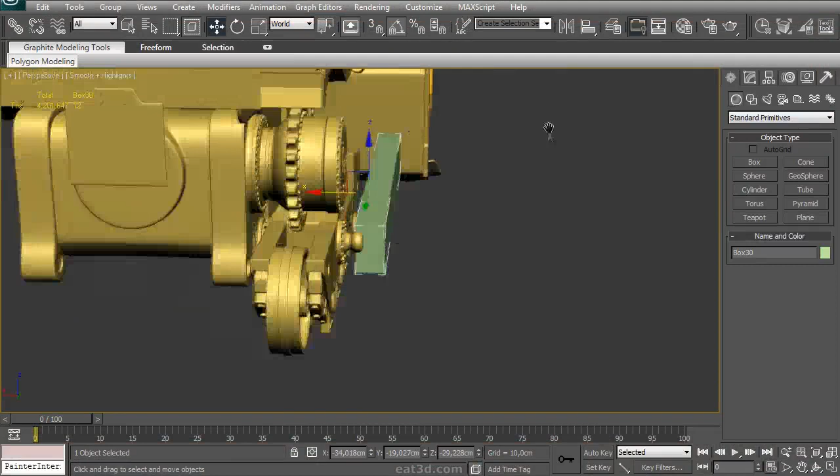I'm just starting off with a box here, and another part I'll be needing to connect these boxes to the big axle is a cylinder. You can see me creating that here, trying to align it nicely to the center of that axle.

Because that axle doesn't have its own pivot, I'm going to have to align it manually. Here we are. Now with that done, I need to align them slightly more. This looks about right. Then I'm going to turn the segments down to make it easier to work with, and I think I'm going to use 18, which is always a nice number to work with.

Then I'll perform an inset on it. This inset just serves to create the hole in the center there. With that hole done, I'm going to go for the next adjustment, which is creating a division in the center.

The reason for this division is the connection for the mounts to the big axle is some sort of clamp. There are two halves of a cylinder that are clamped around this part. They're connected with big bolts, and if you'd loosen those bolts, you'd be able to remove the mounts from the center axle. So that's what I'm doing here.

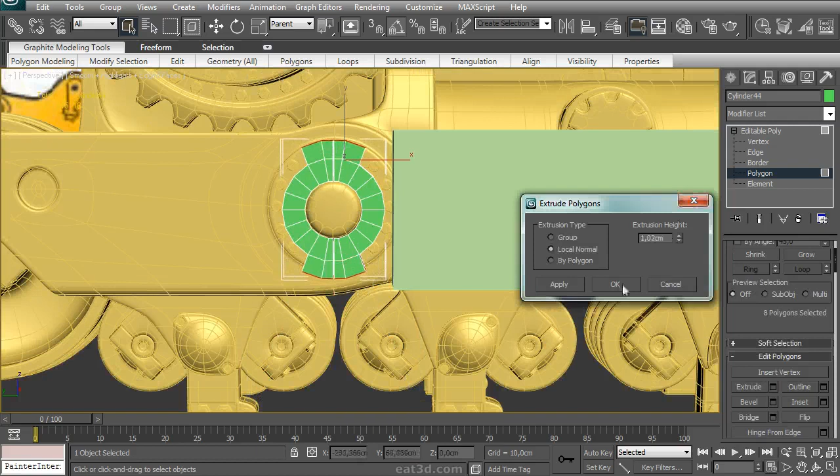It's a little bit tricky to model, but not all that difficult. These parts are actually sort of extrusions, and these extrusions are where the bolts for fastening this clamp mounted to. So first I'm aligning it on one axis, and then I'm using the snap to move them to a perfect perpendicular shape.

Doing the same on every side. Not very difficult. There we go. That done, I'm going to add a few subdivisions to make sure these things are hardened up nicely, and then adding an extra one here.

I'm going to add an extra subdivision in the center, move that out slightly, and then I'm just simply going to move these in. This is an interesting shape. I like how this has this sort of beveled look, so I'm definitely paying attention to modeling this correctly.

If that's done, I'm selecting these shapes. I'm using select by angle, which makes things a lot easier to select. I'm just simply removing these loops again, as I'm going to use the inset trick to add some extra loops here.

The inset trick is easier than having loops running around corners, because then you have to manually connect them. But if I use this trick, as you can see at the corners of those extruded parts, it just looks nicely like it should. Here we are.

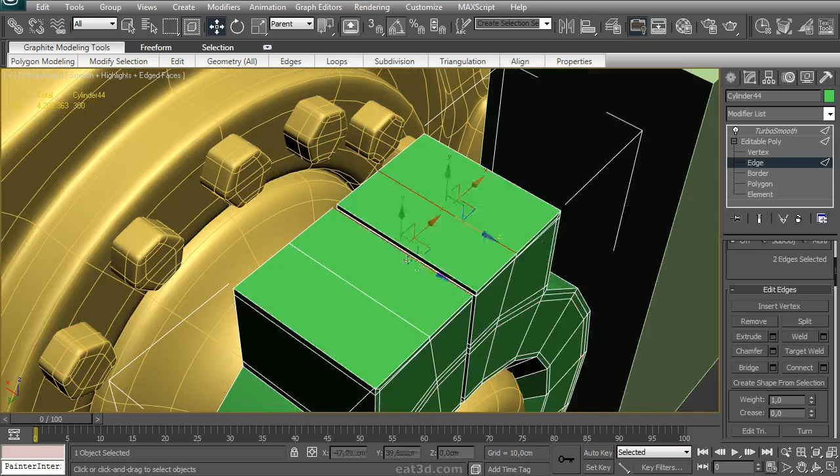I'm just going to add another line here and two extra connects here, and there we are. Two more in the center. And now we need to model the part at the back of these clamps, and this part just connects to the main mounts for the front blade.

Nothing too difficult. I'm just using a line tool, moving this around. As I said, these things are mounted together with bolts, so I'm just using the same old bolt model as I have all along, and I'm copying it down and reusing it.

Then I'm just mirroring them, so they sit on two sides. With that done, I can just attach all of them. That's a lot easier to work with and reduces the number of objects in my scene.

That done, I'm going to add a few extra edges here. Might seem a bit strange since I'm creating n-gons, but of course, I'm simply going to fix this up by removing one loop there. If I'd have created this before I did the inset, then I wouldn't have had this problem, but fixing this manually afterwards isn't that much trouble at all, so I'm just doing it this way.

So there we are. Added turbo smooth, looks pretty good. Just need to do a slight adjustment to this axle in the center. So I've selected that object and I'm working on that one.

Selecting every two other edges of that cylinder. The reason for that is there are actually 4 holes for another set of nuts and bolts in the center of this axle. I presume that's just for fastening things together. Don't have that much insight into how this bulldozer is exactly constructed.

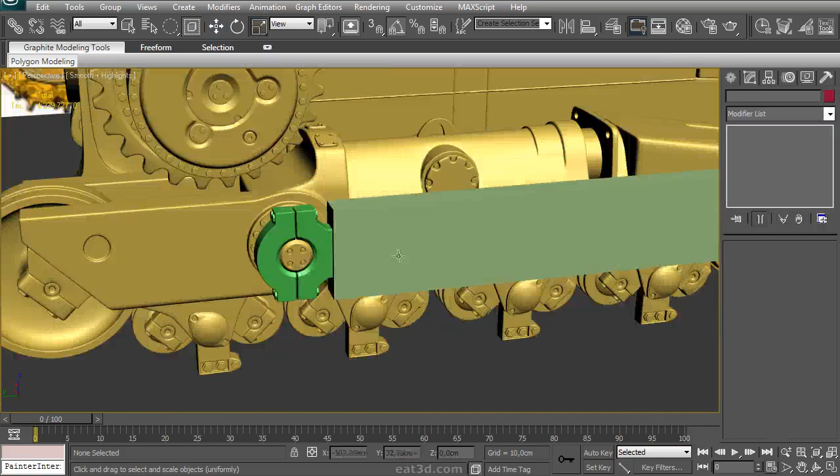With the entire connection done there, we can just focus on this big metal beam here. This beam will form the main connection between the body of the bulldozer and the blade at the front. I'm simply adding in a few large subdivisions and a few smaller ones at the edges to get the main shape down, and I've added this interesting diagonal one at the side.

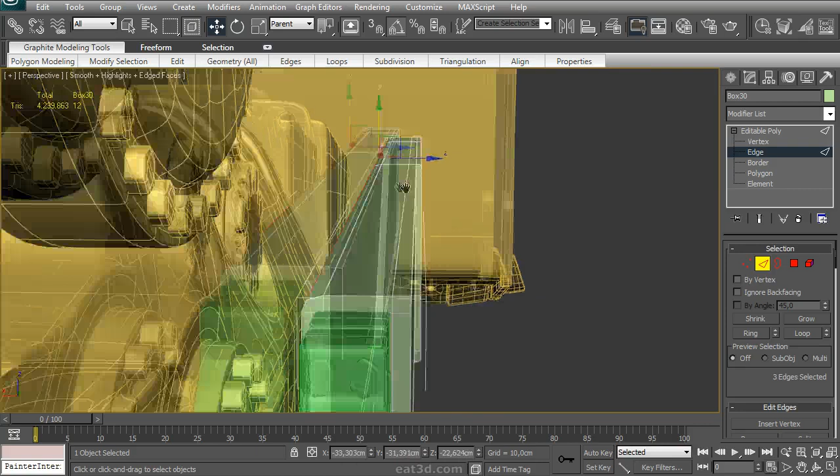That's because there's actually an extruded diagonal shape on this beam at the side. It's not that big, but it's interesting enough to model. Make sure these line out nicely. And the side of this thing is also slightly beveled, so I'm just moving these edges around a little bit. It gets a little bit tricky with that extruded part over there, but nothing impossible.

So I'm chamfering this one up and then moving them around to add some extra subdivisions. This is all just prep work for details that will be modeled into the beam. There are a lot of subtle height differences in what might seem like a simple shape.

There's another slight extrusion here. Of course, if I do this sort of extrusion, I need to make sure there's a lot of geometry to support these edges.

Okay, have a look at what that looks like with turbo smooth. And there's a slight problem there at the top. I haven't taken into account the exact smoothing there. There we go, move it in with edge constraint, move it out so it gets aligned with the edges next to it.

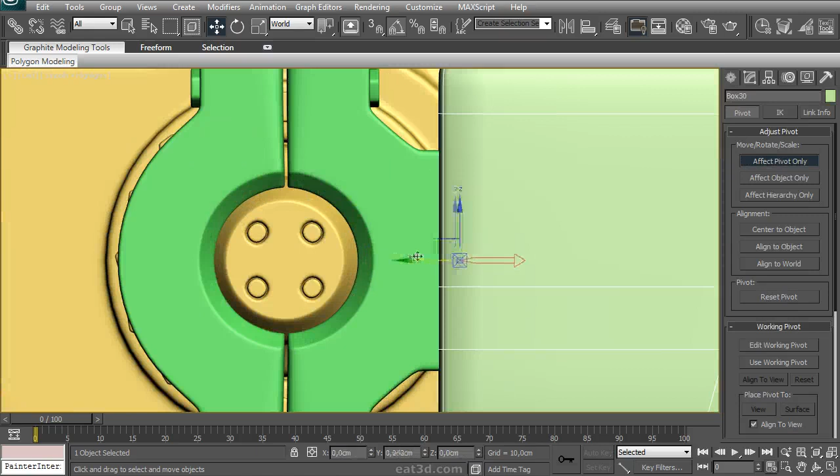Okay, so now I'm moving the pivot. Why am I moving the pivot? Well, since these beams don't sit exactly parallel to the body, I had to move them out slightly. You can see me rotating them slightly so they line up with the mounting points on the blade, or well, the soon-to-be mounting points on the blade.

Here, a small little detail, nothing too complex, just a box. Adding some edges to it, doing a little bit of modeling. Nothing too crazy.

I'm using the scale tool here instead of the move tool because I think it's easier for doing symmetrical, uniform movements. Probably have seen me do this before. Instead of moving up and down, I just use the scale tool.

Okay, so we have our shape down. This is the shape itself here. Starts to get a little bit more interesting. There's this sort of T shape coming out of it and actually slopes down at the end. It has a few more slopes to it, so I'm adding a few subdivisions.

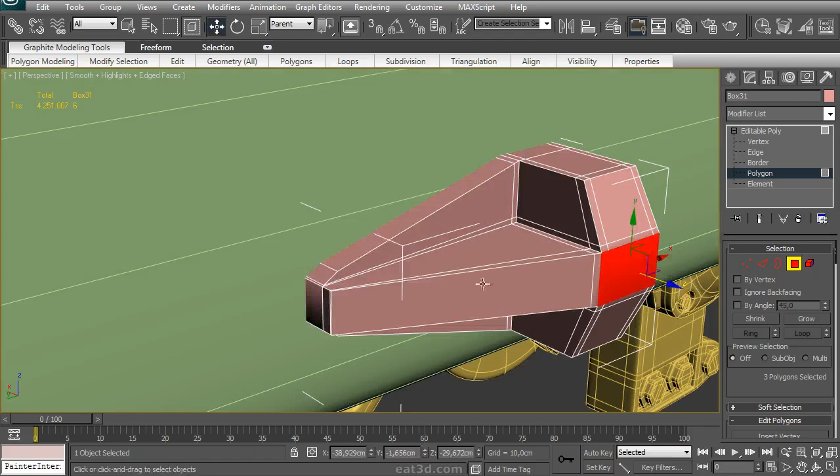Make sure this works. Extruding that edge just to make it a little bit more interesting.

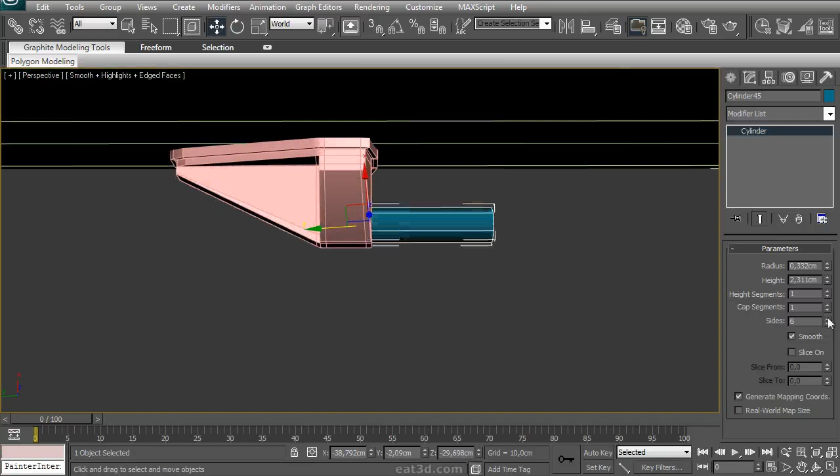And then there is, well, this is interesting. There's a sort of handle attached to this shape. This thing, I think it's a sort of step for the driver or the soldiers that will be going into the cabin of the bulldozer, to step on and to finally climb to the top. Because the cabin sits almost 2 meters high above the ground, so there definitely need to be some contact points for humans to be able to climb on top.

And this thing actually has a sort of ribbed structure to it, so as to not slip, and it gets a little bit more grip on it. And that's what I'm modeling here, nothing too difficult.

Got a small detail here, as you can see that was messing up the turbo smooth. Looks better. And then I'm using symmetry to copy that one over there.

I'm making that one red in the center. And the red color, as I said before, it's where humans are supposed to touch and have contact with the bulldozer. So that's the point of the whole thing.

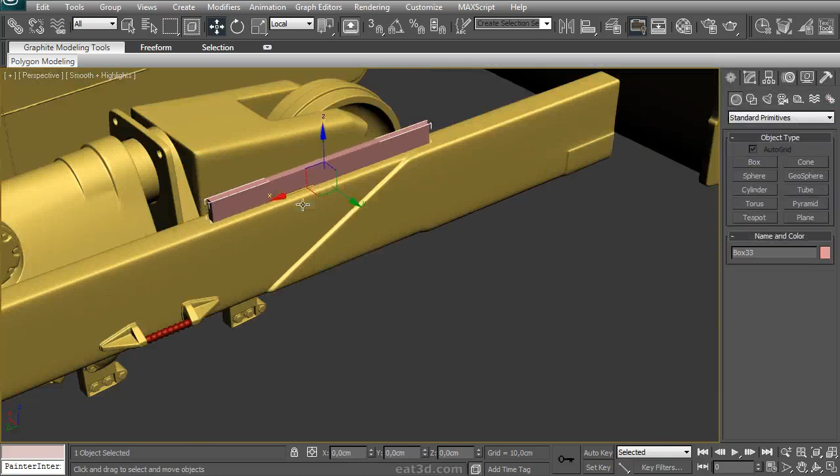And here's another part that gets added on the top. This is a sort of metal plate with a few details added onto it. Creating the base first, and then moving out these parts using Swift Loop to add another subdivision. I'm going to extrude on it.

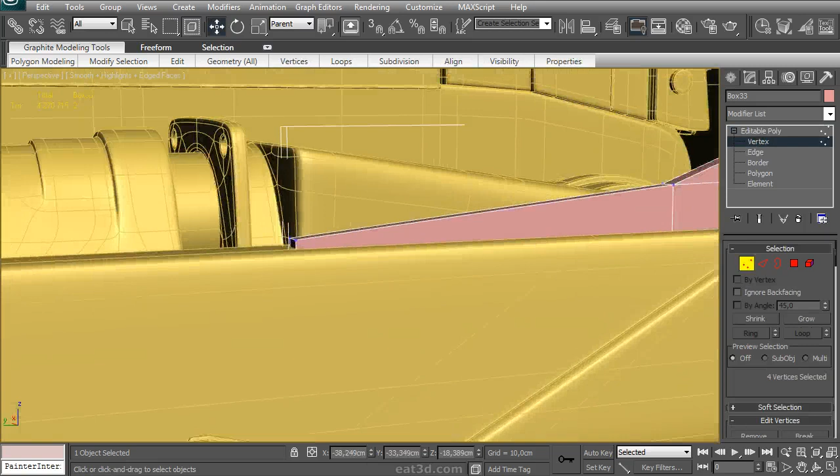And this is what the shape looks like, it's sort of a slope part. Quite interesting, you'll see right away it has a bit more detail on this. I'm just creating the bare minimum here, using Swift Loop to add the necessary loops.

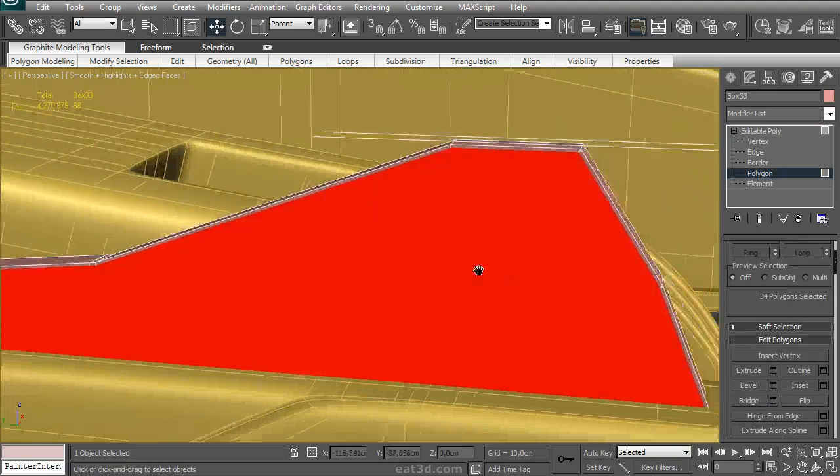We are extruding the bottom. Why am I extruding the bottom? Well, I want to do that little inset trick again, and I don't want the bottom to get inset, so I'm extruding a temporary set of polygons to sort of catch the unwanted inset effect. That one out there.

And performing a connect here. The reason I'm performing a connect here is there are lots of slots in this thing. Every alternating one, there's a slight extrusion.

So I'm using the dot loop here, which is interesting, and just need to deselect a few parts. And with the dot loop, I select every other polygon. And once I have that, I can simply use this for an extrusion.

So if I had to select these manually, it would take like up to a minute, two minutes, while with dot loop, you can just do it in one click, and then deselect the unwanted ones. There we go, there we have the little pattern I was talking about.

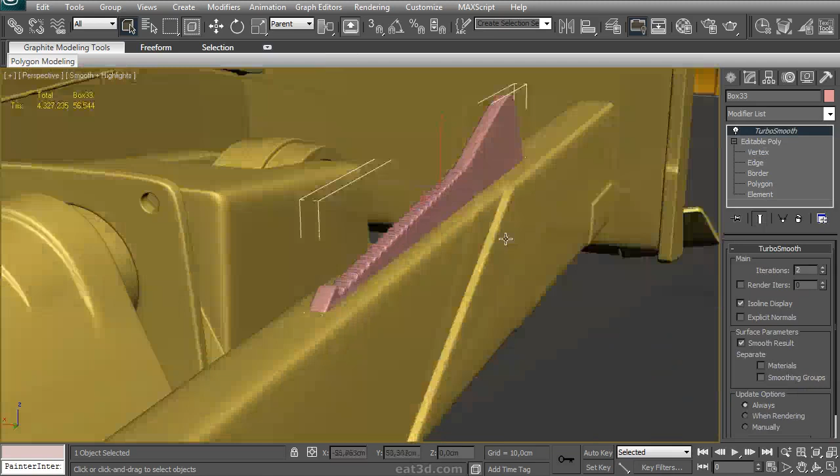I need to add another few extra edges to make sure that looks correct. And there we are, I added a slight detail to this side, which was not difficult to model at all.

Then I'm adding a few edges here. The point of this part with the extra extrude is this is what will actually be connecting to the mounts on the front blade. As you can see, it gets a little bit smaller, slims down, slopes down.

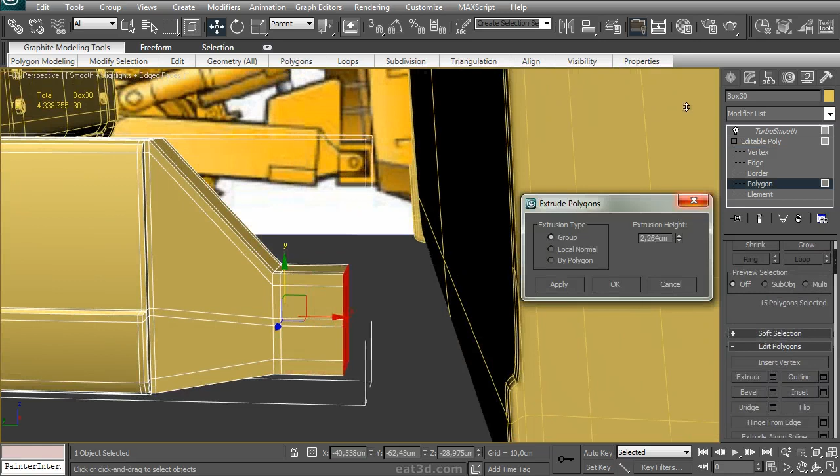Then there's an extrusion which will eventually end in a part with a hole in it. I'll be creating the hole in a minute. The part with a hole is where a big axle will connect to the front blade and its mounting points.

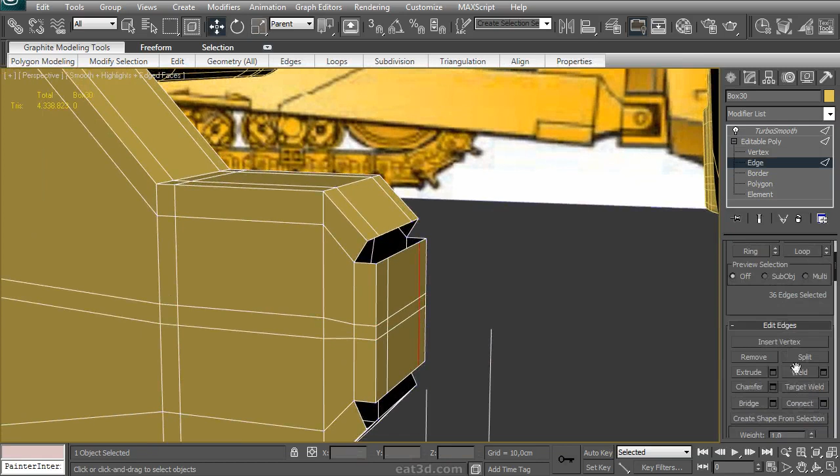Now I just need to weld these parts up. As you can see, I'm doing a weld with edges, which is basically like welding two verts at the same time. It's just a little less reliable, it can react strangely in certain situations, so I only use it when I want to weld fast in an easy situation. Right, so here's the next detail part.

This one's really easy. It's just a plate which I think provides some protection for some part of the bulldozer. Nothing too difficult. Also, as you can see, I'm modeling this part straight compared to the blueprints where it's slightly angled. The reason for that is it's much easier to work with, because otherwise you'll have to mess around with your coordinate systems a lot more, and I just prefer to avoid that.

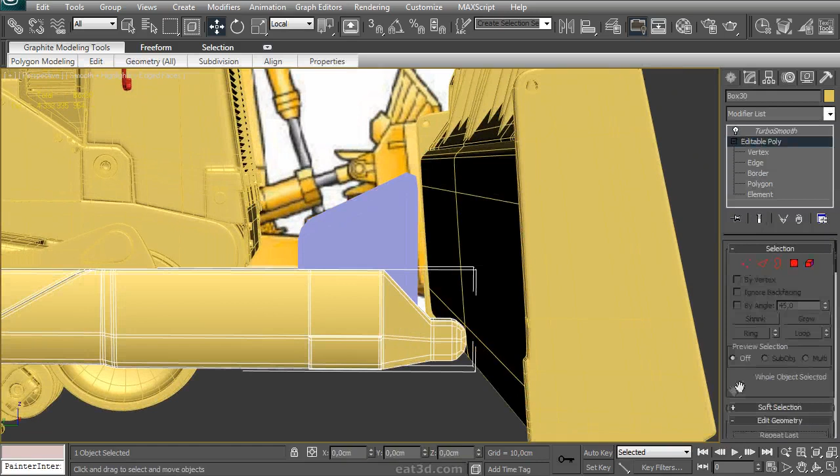Then when I'm finally done with the part, I rotate it into the correct position. You've seen me do this before a few times. It's nothing too shocking, it just makes working easier with complex parts like this.

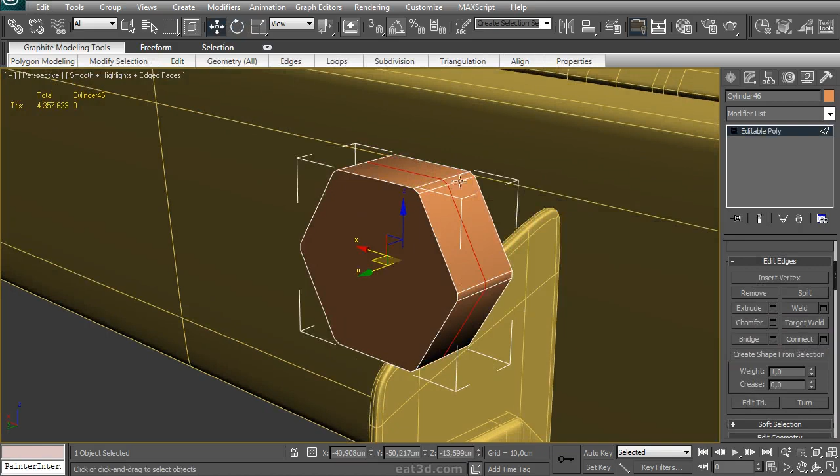Okay, so the next part up, you can see me creating a cylinder for that. There's this pretty big piston that sits on one of the beams that connects the blade to the body. This piston is quite interesting, it's really massive, really chunky, and it has this interesting hexagonal rounded shape at the front.

So I'm starting off with this hexagonal shape, but the problem is it goes from a hexagonal shape to a round shape, and it's a little bit hard to fix that. But I'm just going to select this and use a little trick. There's a loop tool, and if you hit the curvature button and then circle, you can get this into a perfect circle. Nothing messed up about that.

As you can see, I went from a chamfered hexagonal shape to a perfect circle using a few button clicks. So, loop tools, there's just two buttons you have to press: curvature curve, and then the circle button.

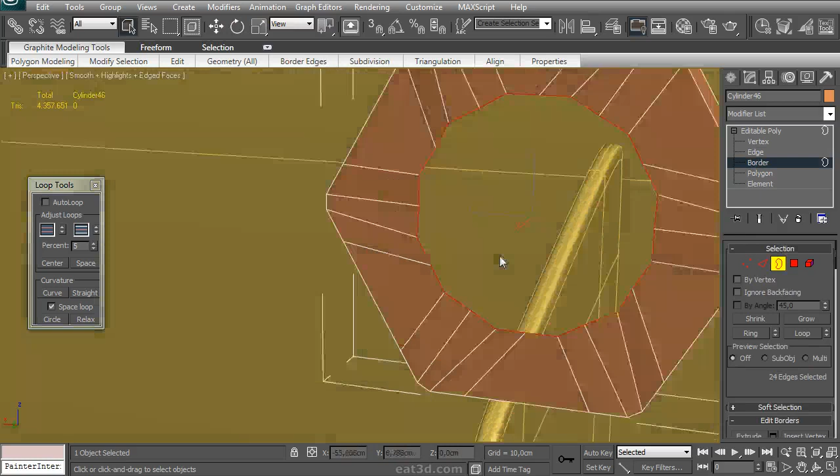As you can see, I added a few more. I'm just going to click the space button to space them out, and then hit the circle button to get them into a circle shape.

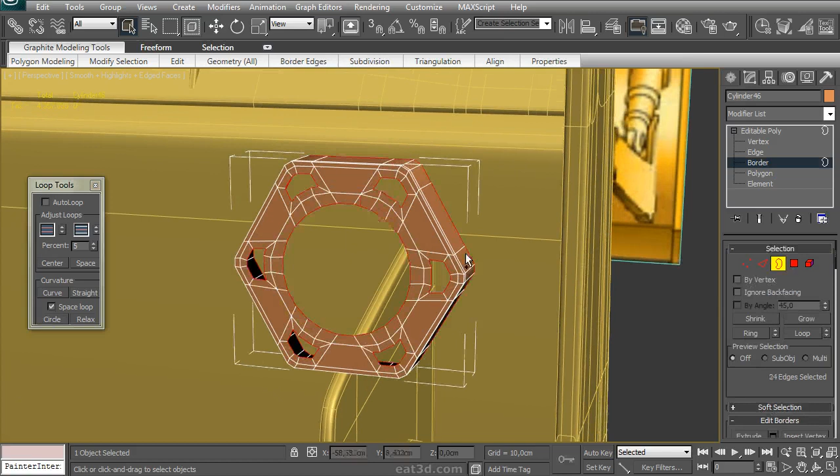I'm adding a few extra edges here to make sure these corners are rounded nicely. Then I'm selecting all these corner polygons, forming an inset on them. I'm just going to do the same circle trick here. The thing is, the circle trick only really works correctly on selections of borders, you can't really do it on polygon selections.

As you can see, this is really allowing me to work quickly with this part. Otherwise this would take so much work, while a few interesting uses of the graphite modeling tools can really speed things up.

So I'm chamfering this part here, and why am I doing that? Well, that's simply because there's some extruded and beveled parts there.

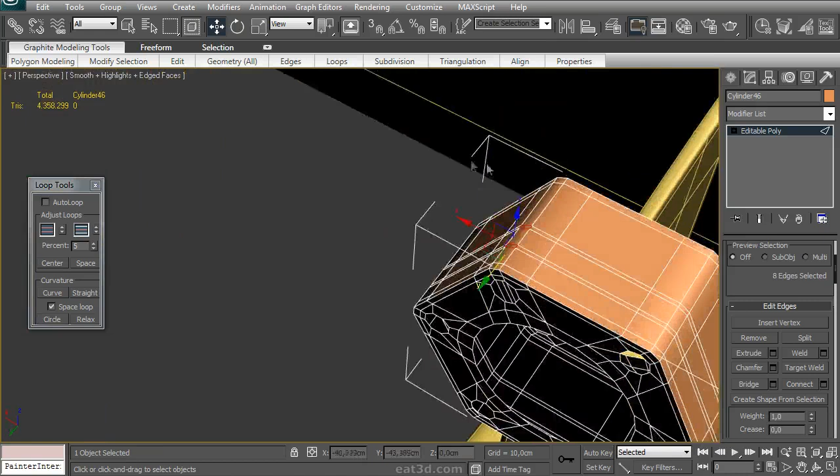Just going to select these edges, do a ring select around, convert them to a polygon selection, and then just do an extrude and an inset to get those down right. Use the Swift Loop tool, set boundaries on them.

There we are. Now we can just continue on the back of that part, the rounded cylinder I was talking about. First, there's a slight bevel, which I can tell by looking at the reference.

And then there's the extrude for the actual cylinder itself. With that basic setup done, I'm just going to concentrate on finishing up these holes first, which is just a few extrudes and insets, or you could alternatively use the bevel tool with alternating options.

I'm not minding the front there, that looks obviously messed up. Just looking at the smoothing of what I've done before. Needed a few edges, did that. And back to the main cylinder.

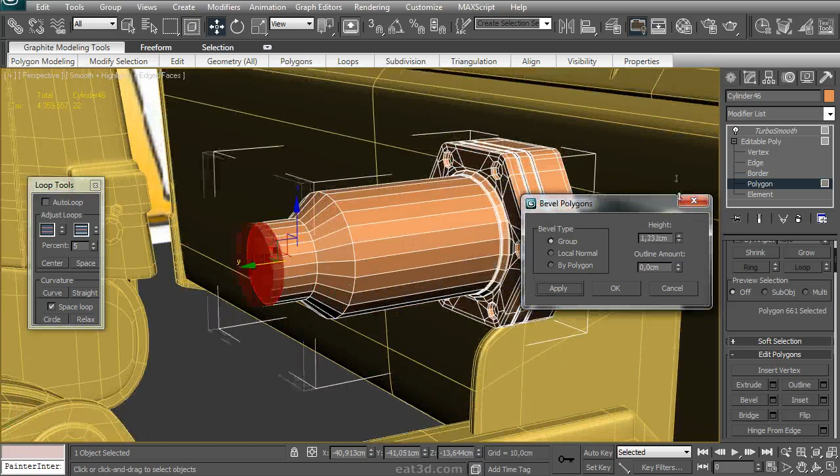This is just really the rough modeling, trying to get the shape down. Proportions need to be right. Because this is such an important part, I really want to get the proportions right and not start detailing too quickly, or have the general proportions down.

So I think these are okay, and then I just start adding a few more edges. Another chamfer here for this sort of ridge that runs around this piston. And there's a bit more detail here as well, some sort of ridge thing.

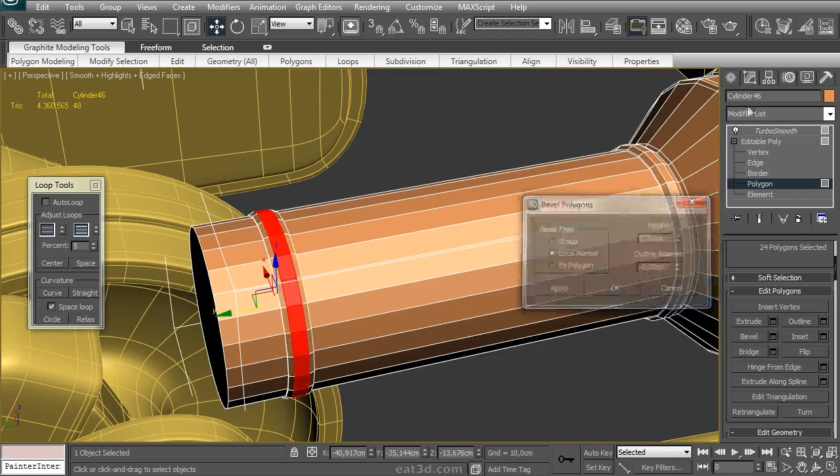All right, a few more insets, a few more chamfers. Basic shape is looking okay. I'm going to go back to the front and just add a little bit more detail there. There are no holes there, since the bolts are at the back of this part.

I'm going to cap it up and start modeling the details on the front. Once again, you have this hexagonal shape here. And this one's a little bit tricky also.

You get this sort of, what I call, a star-shaped part that extrudes. And it's a pretty complex shape. As you can see, this piston thing, it's pretty cool on how it all fits together, but definitely a challenge. So I'm using the right selection of polygons here to get things right.

You can see there's another problem here, mostly due to wrongly scaled edges. I'm just using the scale tool to get these right again. As you can see, some of them are inverted, so I figured it's going to be a little bit too hard to fix this.

So once again, using the loop tools, there we are. You got to remember when you use the loop tools to get a perfect circle in there, sometimes you gotta just use the make planar tool, because it pulls the verts out of their plane sometimes.

Okay, so right now I'm using the array tool to get some bolts in there. Nothing too complex, just using the pivot of the big piston. Got the bolts in there, attaching them together. You've seen me do this a million times already.

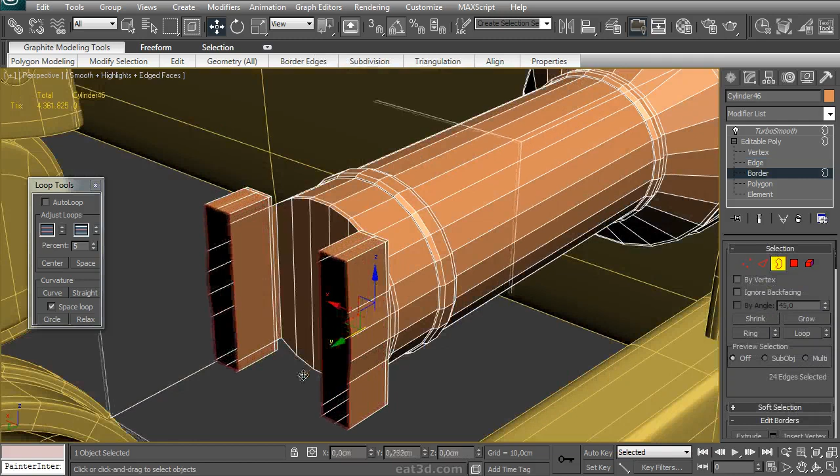So as you can see, I did that on the other side as well, and then I'm extruding these parts. I need to fix up a lot of puzzles here in terms of n-gons and how things connect. You can just see me move the verts around there.

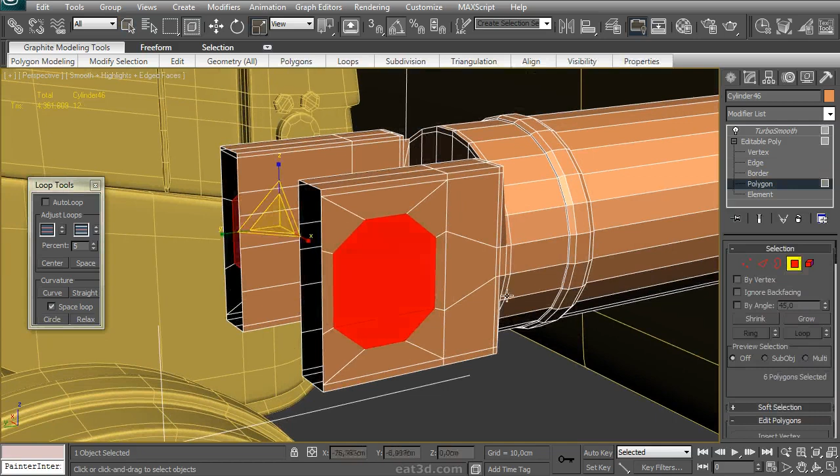Now I'm using an inset here. Why am I using an inset? Well, there is a round opening in the center for an axle to fit through. There we are - using the Circle button again and slightly rotating to get a circle.

You can see things are really cramped here. This is definitely a difficult part. I'm just going to scale these down a little bit so that looks slightly nicer.

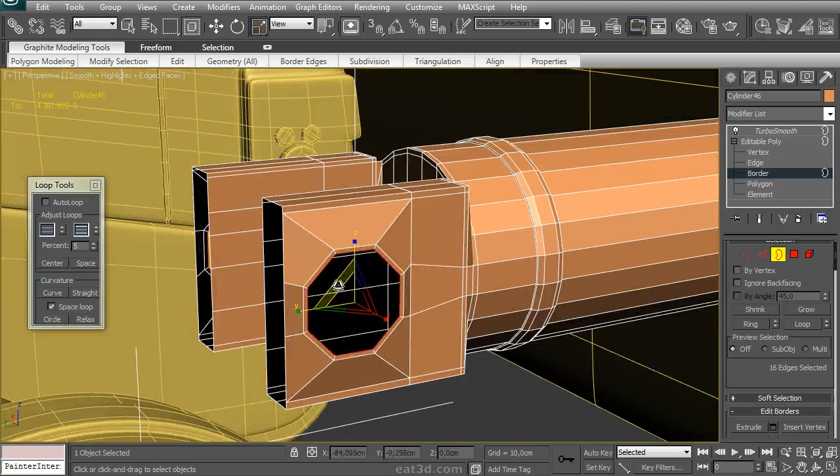I've scaled them outwards a little bit because on the reference they actually bulge outwards slightly. And then I'm using a few insets and extrudes to move them inwards. I need to fix up this end, which is basically just a few extrudes to get things down right here.

It turns out that the number of segments on one side doesn't match up to the other side, so I have to fix that by removing a few. On the inside, it's a closed loop - it doesn't run along the entire object, so I can just delete a few.

This loop is actually not needed. It makes things complicated for me, so I am removing it. You can see having less loops makes it easier here for me, so that's what I want to do. Again, doing an extrude.

Moving these down to match that edge down there, and then simply selecting these and welding them together. Another shift move down, align them on the Y-axis, move them over there. And now I can simply use the bridge tool between two separate edges. Need to make sure all verts are welded, so I select them and hit weld.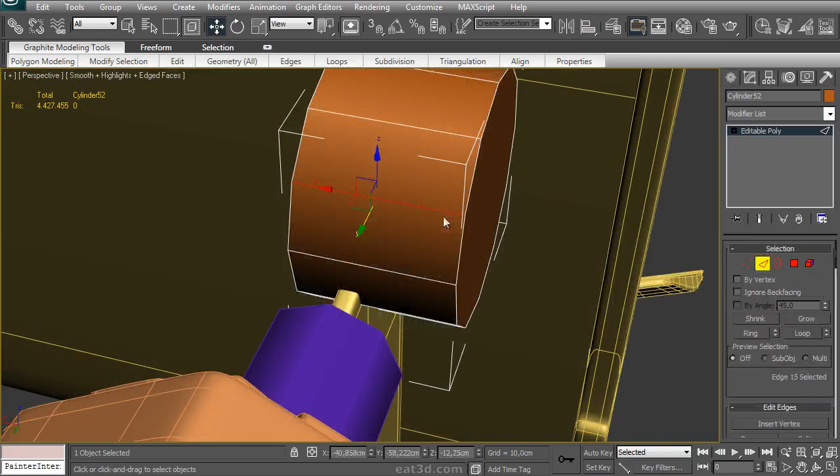Back to the front. That's what I was talking about. A piston is always made out of two parts: there's the sliding part, and the part that holds the pressure and pushes the sliding part in and out. This purple rod here at the moment is the rod that moves in and out of the piston - that's the polished part, polished because it always keeps moving up and down.

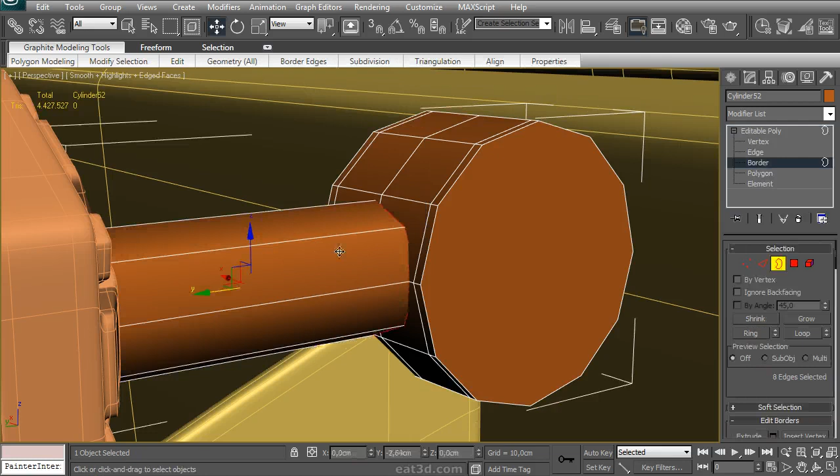The brownish part I'm working on here is really simple. This is just another round part which will be used to attach this to the front mount. An axle will go through, and that's pretty much all there is to it. Attaching them together, moving this over there, and I want to do things cleanly.

I want to connect these together. I made sure there was a subdivision in the center of that round part so I can connect it to the rod. Then I need to move the verts out so they sit almost exactly flush with the surface. Some of them I can use snap, some I can't. And when that's done, I'm just target welding these parts together.

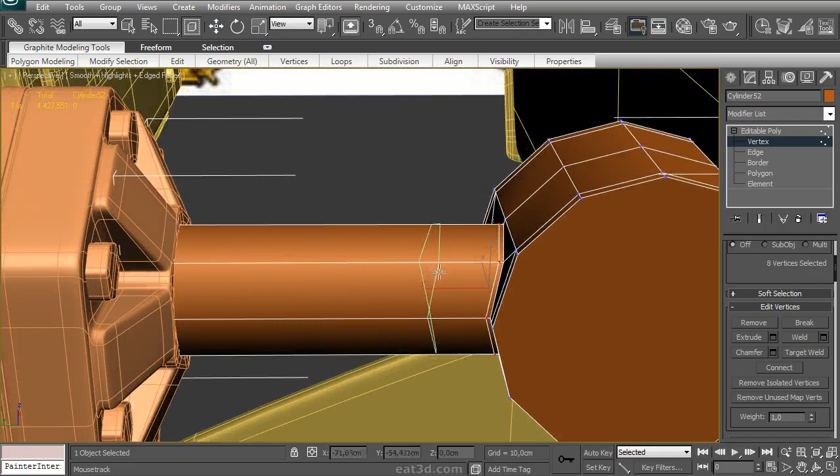Connect it up. Now I just need to add a few extra edges to make sure things are rounded nicely there. That part is actually slightly thicker, so that requires some geometry. And of course, because an axle will fit through there, I need to do a few insets. And there we have it, our very complicated piston part.

Just going to move it into the right position. It also shows me that I have to change a few parts around slightly. Rotate it over the correct pivot point - as you can see, I move the pivot point. That makes sense. And then rotate this to match the blueprint.

With that part done, we move over to the next big important part of the mounts for the blade. These are two very large pistons that attach to the hood of the bulldozer, and they move the front blade up and down. But before we get to those, I'm modifying a few parts of the bulldozer hood where they will attach together. There's this difficult part we modeled before of the angled cylinders connected to the hood, and on the side there's this strangely shaped part which I've just modeled.

Right now I'm just working a little bit on the rounding of these parts. This is just tweaking work, but I want these to be correct before I even consider moving on with modeling the rest of this part. So I add an extra few edges here, and I need to make sure I move these around so that the roundings of this part are correct.

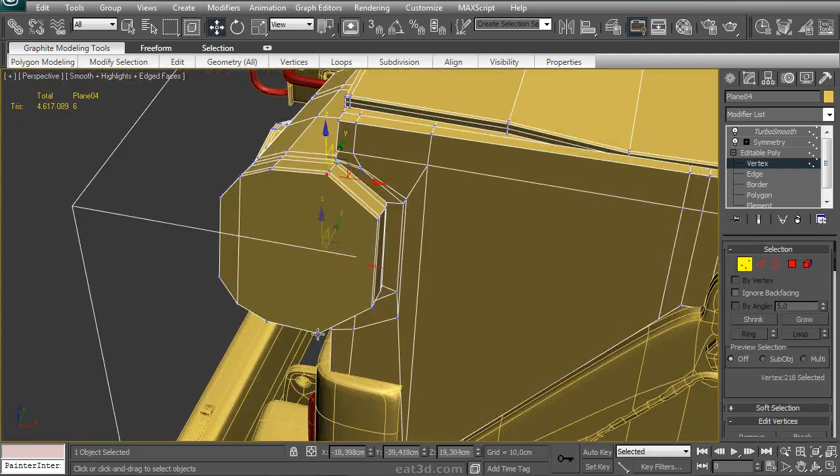I'm also connecting these edges up just to make sure everything is correct. Now that I'm satisfied with that part, as you can see, I added a few bolts to the side there. It's nothing too hard - you can do that very quickly.

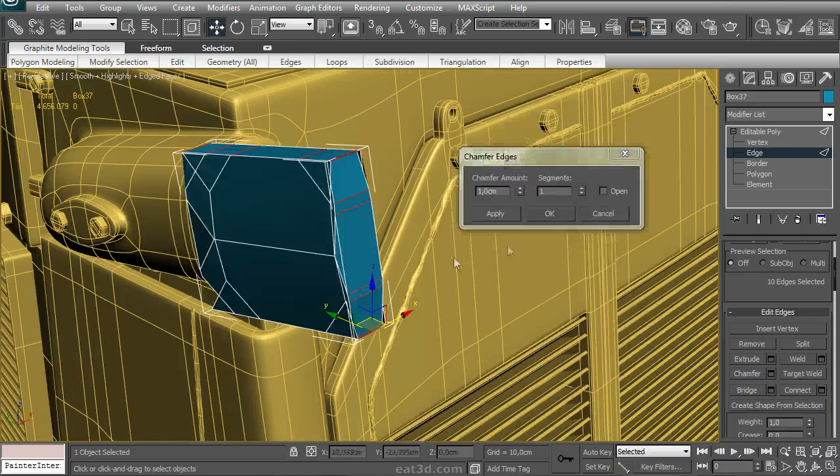I'm going to start modeling these big pistons that sit vertical instead of horizontal like the other ones, because they move the front blade up and down. Simply starting with a box and adding a few extra edges to start defining the shape. Then I want to do a connect to make sure these are hardened up nicely. Chamfer here, because I want this sharp little division in the center, and then two swift loops at both ends to make sure those parts are correct.

Then an extrude here. This part is actually only the mounting part - it's connected to that cylinder we just worked on, and this part will hold the actual pistons. It's not very complex, you'll see right away how it works.

We have these parts selected here, doing another extrude on them. Move these in slightly, and then add a symmetry on top here. I need to move them around slightly so they're actually centered compared to that cylinder. With that done, I'm pasting the turbo smooth on there.

I'm just having a look at what this looks like - that looks okay. So right now I'm creating the cylinder to start my main piston out of. Rotate that downward, set the number of segments correctly, and then use the move and rotate tool to get its initial orientation in the correct position.

I use the type-in just to get things neatly into a correct number. Moving that one all the way up to the top, extruding to the bottom, and then adding a few segments so that I can start modeling.

I'm also moving this into the correct position, and I can see that I need to adjust things slightly there. Not exactly fitting yet, so I'm just going to use the scale tool to scale it slightly smaller so it fits between those two clamps for the attachment.

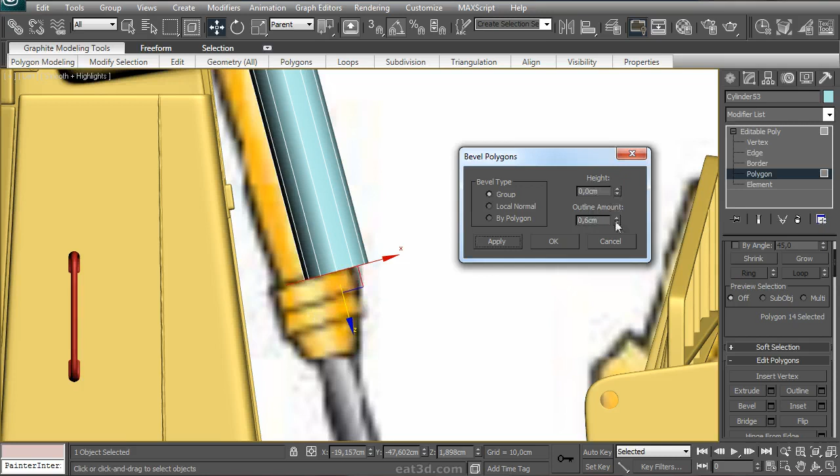At the bottom here, you can see there's a sort of end part that gets slightly thicker and then has a small bevel to make it thinner and actually meet the sliding rod on the inside of the piston.

Extruding using a bevel here, and then throwing an inset using the bevel tool. Add a few extra loops.

And that looks about okay. I need to add a loop in the center because there's a little inset ridge there for two parts that are, I don't know, screwed together or something.

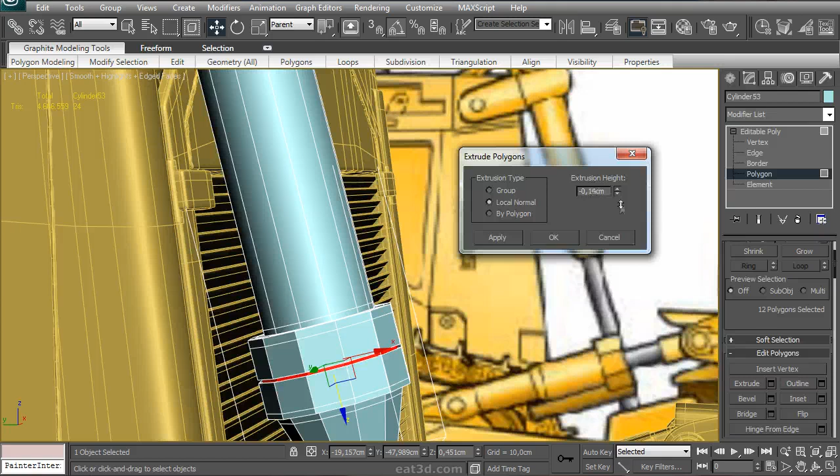That one there, and I'm performing a slight extrude. I've actually detached that plane to a separate object so I can just start the rod, the sliding rod on the inside, using that separate part. The advantage of that is your pivot will be in the right position, your number of segments will be correct, and the part will be orientated in the correct way.

We have the main setup for our piston done. So what I'm doing right now is adding some more details to it. As you can see, the civilian piston is quite simple, not too complex.

The military version has this part heavily armored. Why is that? Well, it sits at the front of the bulldozer. It's very open, and if this would get hit by an RPG or something, it would destroy a critical system of the bulldozer, so it definitely needs to be protected adequately.

So the military version has this sort of - I guess it's something to attach ropes to, or something to hold on to - this sort of a loop thing.

And that looks slightly too rounded, so I'm adding a few more segments to that. Here we go, using a ring connect. Okay, that's about good.

Now I've created a plane here, and the reason for this plane is, well, this is going to serve as the base for all the armor that I will be adding to these pistons. And it's interesting, this armor actually - it's really big and fat. It sits around the outside of the clamps that hold this piston in.

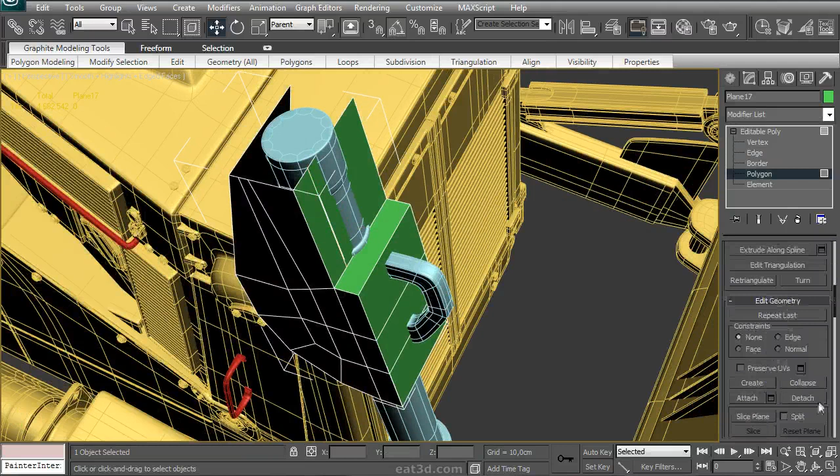The armor is symmetrical on both sides of the piston. Here we are. Now, interestingly, there is a sort of slope part that cuts off that corner there, and it's a little bit tricky to create something like that.

I need to add a few extra edges for that. With that done, I can just weld these together, and then I will use snapping to snap these into the correct position.

Now you can see you've got a triangle there. That's not going to work with Turbo Smooth. That's right - we'll get back to that right away.

First, I'm going to model the other side, and this side is different - it's a little bit simpler.

Once this one is done, we'll copy it to the other side like we've done with every part so far. Okay, there's a little slot for the loop thing that comes out.

And now I'm actually creating an opening for the armor to fit around the hood of the bulldozer. Moving this around slightly - it's an interesting shape, it's got a few weird little twists in there.

So I just need to go ahead and add those. The basic shape is almost there now. Now it's down to getting the flow right and connecting things up nicely.

So we've got these things done here. I'm going to fix up this little area. What I'm doing here is I'm actually going to leave it as a triangle for now. I can fix it up by adding one in the center, but it's not going to mess things up. It looks okay.

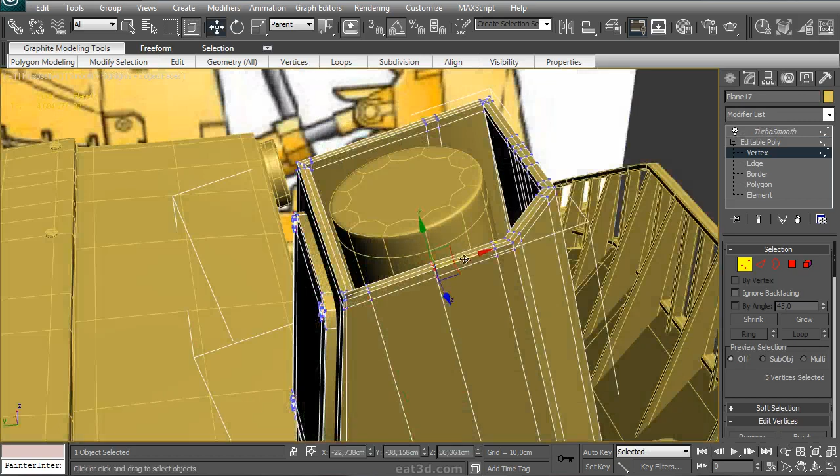You can't just use a simple plane for that. Once that shell is done, I'm using a few extrudes to get that part on top extruded nicely. There are also a few details on the side—they're really not complex, and I don't think it's worth showing you guys that I modeled these separately. They're just cylinders with a few insets and extrudes on them.

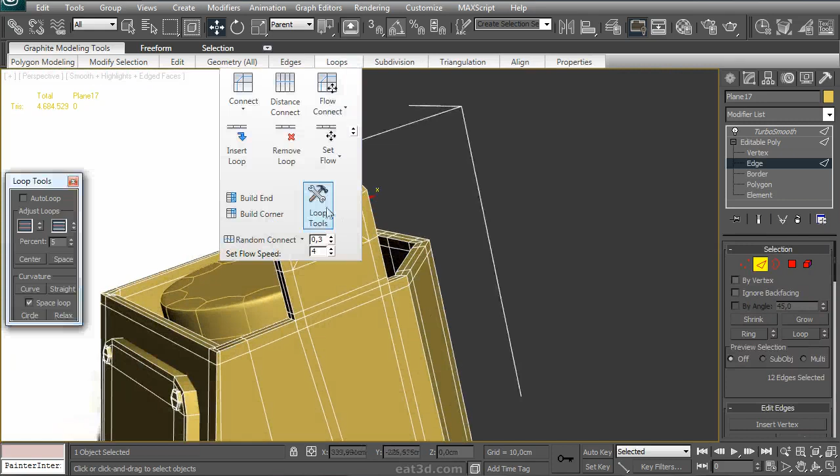At the back, there's also a little plate with some bolts added, and then there's this part at the top, which I will once again create a hole in. The reason for this hole is it'll be used as an attachment point for the lights that sit at the top of the bulldozer.

You can see me using the make planar tool here. Slight problem with that rounding tool—we are connecting those together, then using a connect. And once again, connect here. Use scale to upscale it so it stays uniformly rounded. That looks about right.

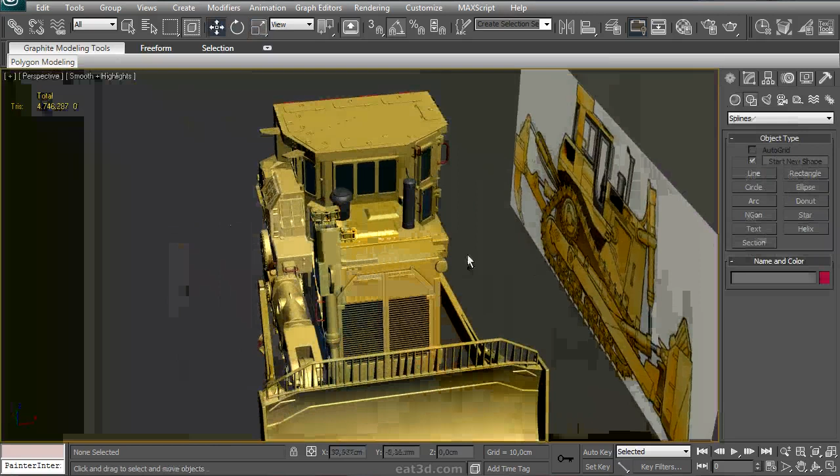Okay, so the lights are on top of the bulldozer now. Those are pretty simple to model—just a box and some splines. I also copied a part from the light at the track covers, so that's not really that difficult. You can figure that out yourself by looking at the model or reference pictures of this bulldozer.

Copying it to the other side, and as you can see, there are also some attachment points modeled at the back of the bulldozer. These were also done separately—nothing too difficult, just some extruded parts with a cylinder in between. You could model these separately; I decided to model them in one part, which made it a little trickier.

You can see it's a big mess of wires there, but it's nothing too complex. If you can follow this one over here where I'm creating the attachment point for this piston, then you can definitely create the other ones as well.

Right now I'm just adding a few more small details at the back and changing this silhouette a little bit. This part isn't very visible, so we don't need to pay that much attention to it. That done, I'm just going to add a few more extra loops to make sure it's rounded off nicely, also at the back.

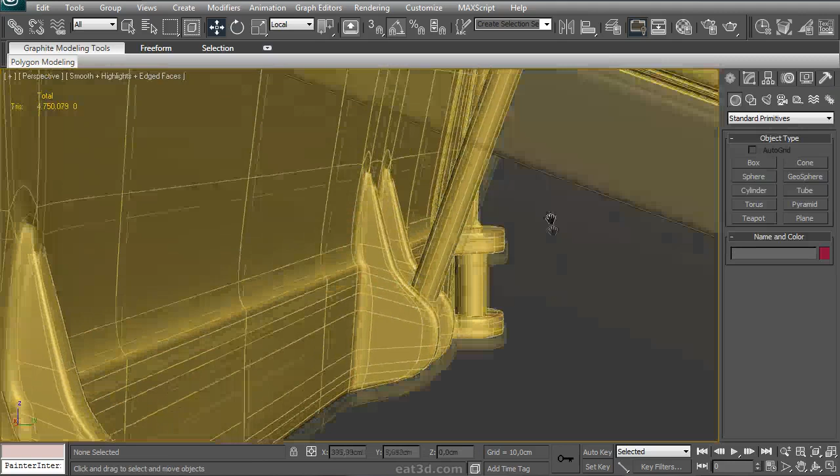With that done, that looks almost okay—just some ugly smoothing at the top. We can fix that with two extra edges. And there we are, that looks almost okay. Still another one I forgot. As you can see, there's really not much to this, very simple. Because I kept this as a separate part, I can have the wires run through all the time.

And now here's that little piece of axle I was talking about. You can just simply use a cylinder for that. Always remember to reduce the number of segments to a workable number.

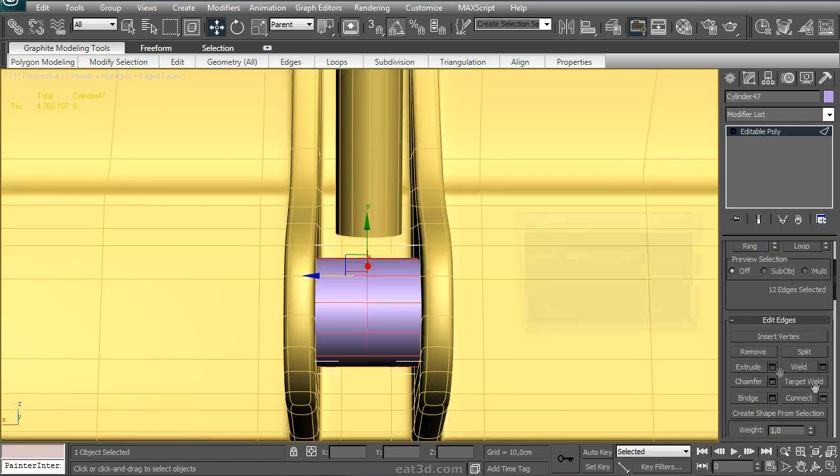With that in place, I'm just going to add some more geometry that I can use to make it look like it's connected to that big rod that comes out of the piston. Something like this—you can make planar, be easy. And there we are.

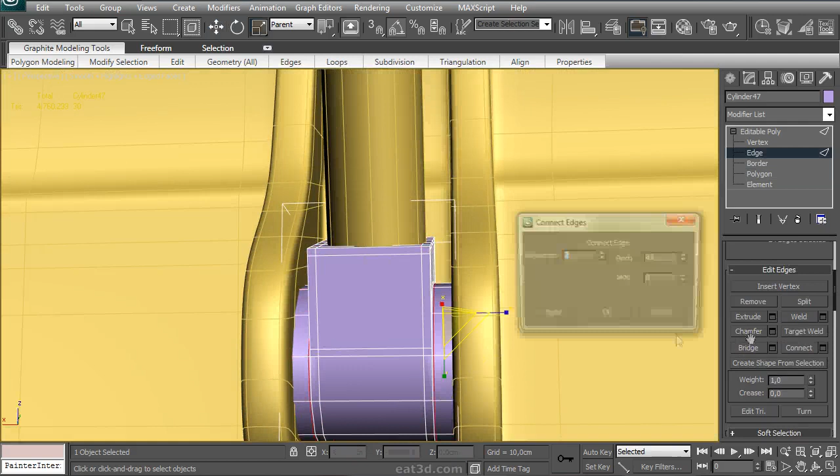Add those extras. Now I just want to attach this part together. There we are—don't need to add too much detail to that or anything. I mean, it's not really necessary. You'll barely see it; that part will be in the shade most of the time.

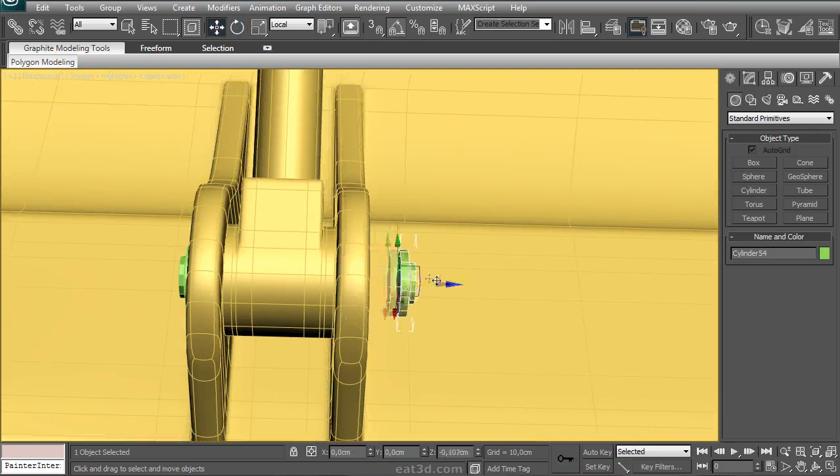That's something I do want to add on the outsides of this mount for the piston. There needs to be some sort of visual clue that there's an axle running through it. If you can only see it on the center, it's not going to be that interesting. So I'm going to create one of these, copy it to the other side, rotate 180 degrees, and move it back in. And that's it.

Then just attach it back to this part. Of course, can't forget—need to make them a little bit larger, like that, so that they're really visible. So, that's interesting enough.

Okay, so we've got this part here at the top. This one's a little bit too wide, so I need to move this in. We're just doing the same thing here, leaving a visual clue on the outside that there's an axle running through there. Makes it interesting to look at.

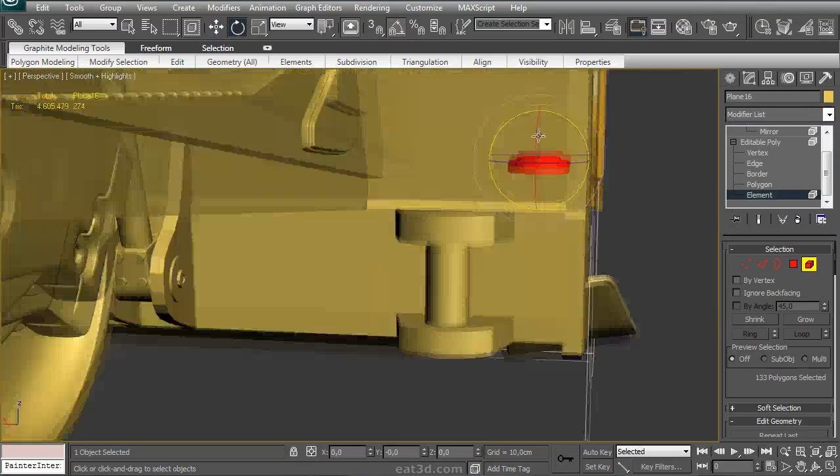I'm just going to grab this same part and use it at the bottom. On the reference, this might not all look 100% the same, but it doesn't matter. It's just faster to work this way, especially on a part that's less visible than others.

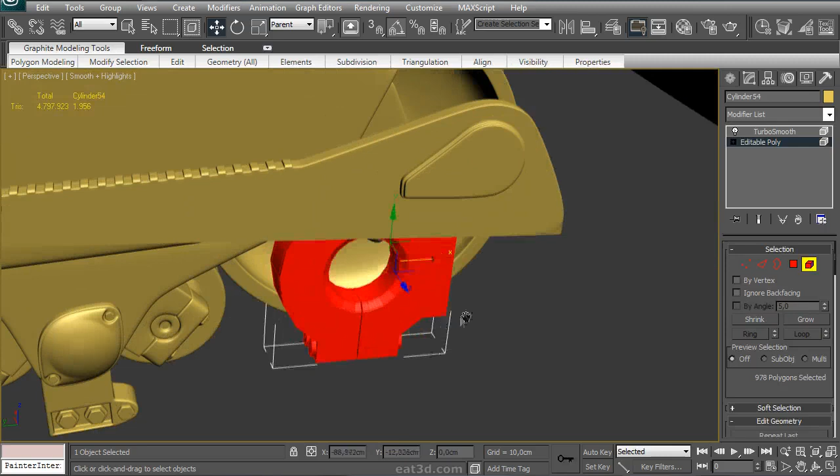That's done. I'm going to grab this part from the big beam and reuse it as well, because there's one funky part on this bulldozer I couldn't find much reference on. It was a little bit tricky, and it's this sort of rod that connects the back of the front blade with one side of the frame.

They're calling this connection a tag link, and the tag link sort of uses the same connection with these two halves that clamp together as the side there. So I'm just using this part. The tag link connects to the left front side of the frame, and it goes to the right rear side of the front blade. So basically that's what I'm creating here.

It's not that hard, I mean, just closing this part up. Can't forget to do a few connects.

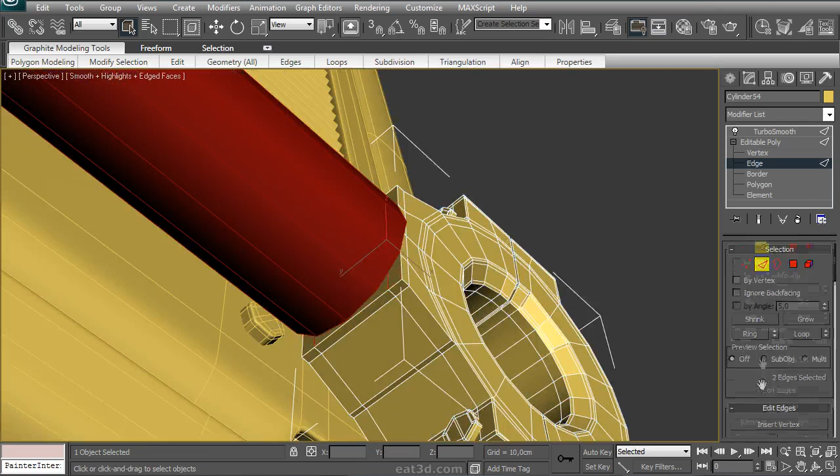Using the connect tool to add the proper amount of segments here. Connect these up. And connect those as well.

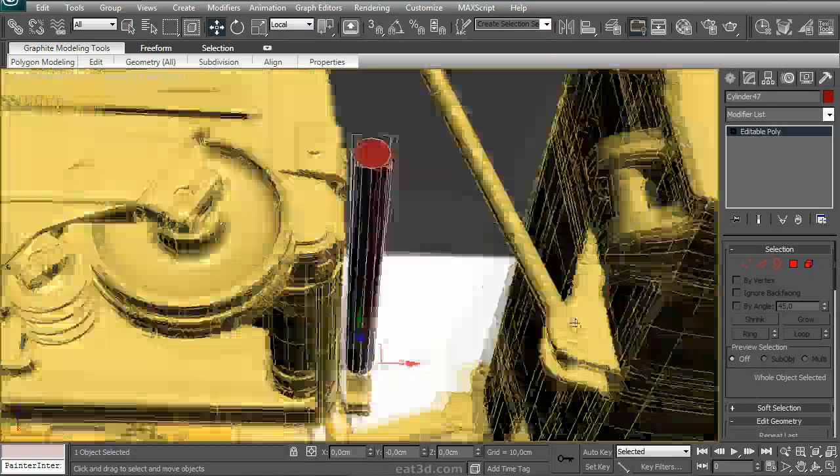Okay, now we can just use that big cylinder in the center, which will be the main connecting part. It's slightly slanted like that, so I'm just going to do the same thing, then copy this part over there.

Connect them up together, form an inset so it smooths correctly. Then I'm just going to add a little detail on the top using a box. I felt like there's really not much reference on this - I'm mentioning this, I could find almost no pictures of this.

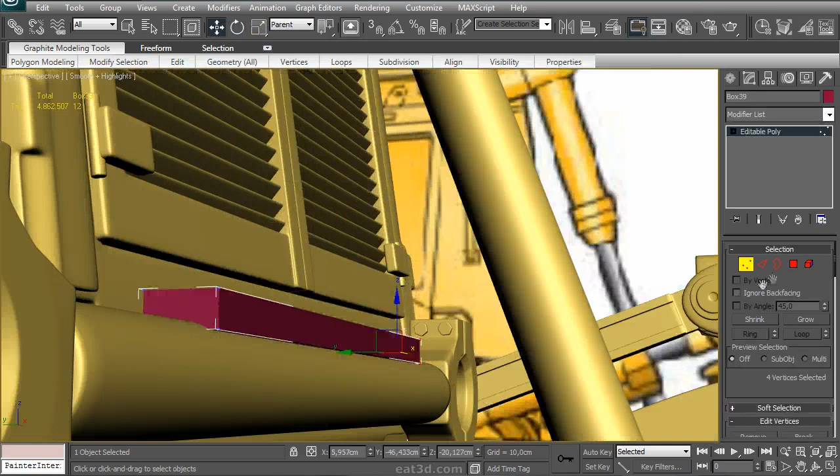So I'm just making this up. I felt like that single cylinder is just a little bit too bare, so I'm adding a little bit more interesting detail by using this box, dividing it a few times so that it subdivides nicely.

Make it a little bit smaller for a second copy. I'll make it a little bit lower and move it to the front there. With that done, creating another small detail. As you can see, this is just simple work - some primitives that I need to combine together to fake the details.

This is some sort of cover under which a few hydraulic hoses are mounted, and you'll see some hoses spring up from under that cover.

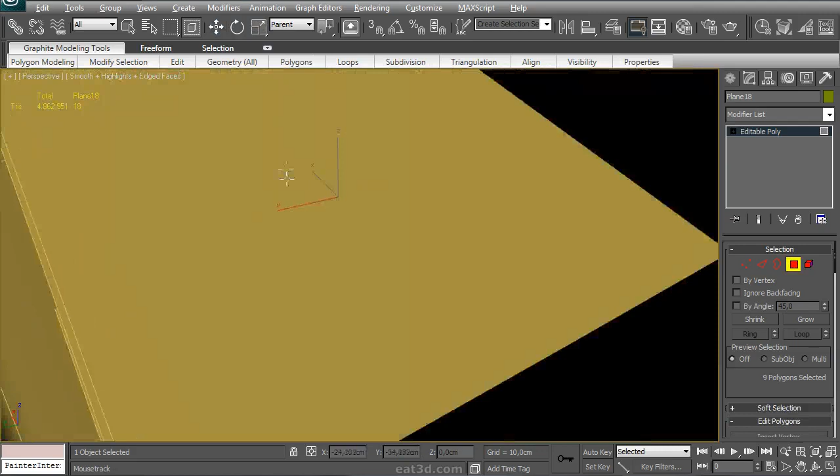All right. Okay. Take those down, and I'm just going to do the same thing on this side.

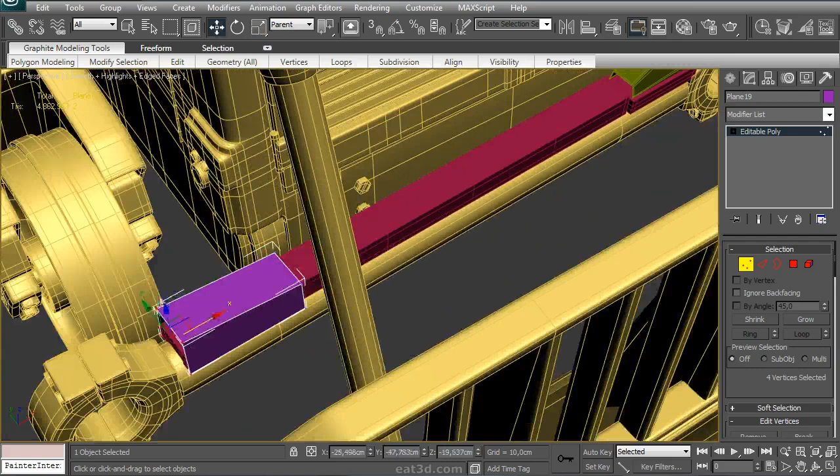Got a lot of separate parts here. We'll be attaching those together in a moment. Just making sure the profile is interesting enough, making sure to add all the correct edges there.

Stitch those together, or shell on them, just to give it some thickness so that you don't get these single plane see-through type of parts that we really don't need.

So one extra part here is this little cylinder, and once again, I'm making this up as I go. There is no reference for this. I'm just adding parts which I think will look interesting on this object.

And this sort of stuff, I mean, I've done this all over the bulldozer. Create a cylinder, do a few insets and extrudes, and you can always create a quick, easy shape that adds some interesting detail.

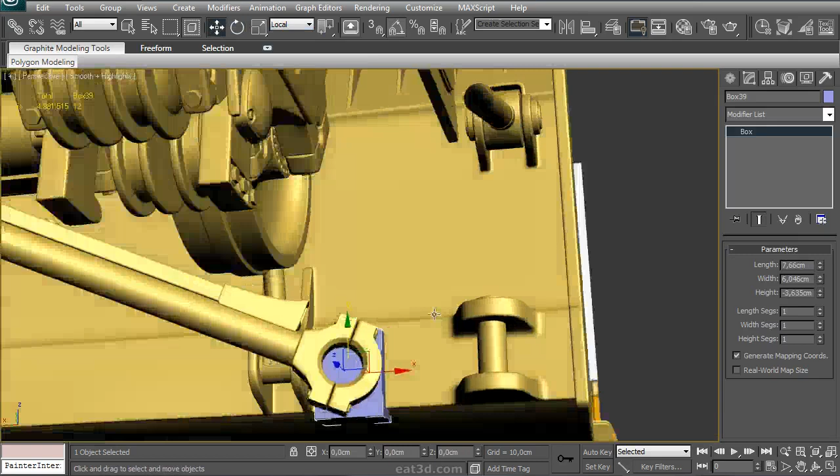Alright, so that seems about done. I'm attaching it, and now I'm rotating this to get it into the correct position. What's missing here is some place to mount it to the front blade, so I'm creating some sort of box over there to be able to connect things.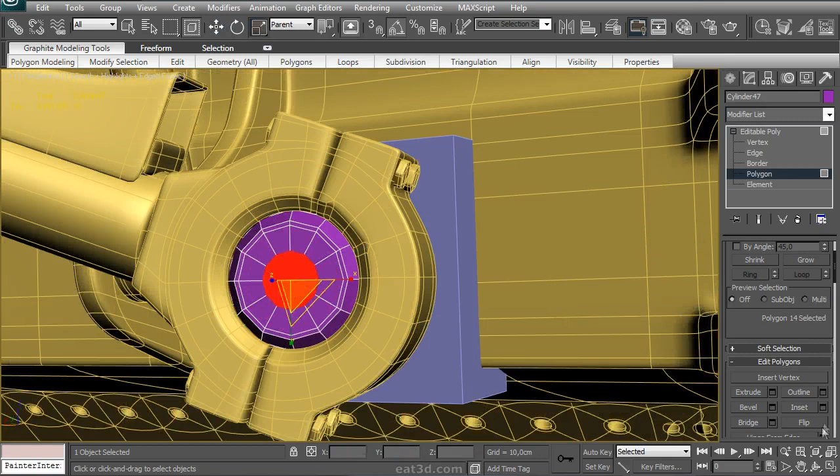I don't really know why they exactly added this sort of connecting rod between things. I presume it's just to limit movement and make sure that the front blade can't bend in the wrong way. But what it does is it nicely fills up a bit of empty area between the front of the bulldozer and the front blade, so don't mind adding it.

Here we are. Okay, this part looks okay by itself, but that blue box is terribly uninteresting, so we're just going to add a few chamfers to it, a few extra edges. There we are.

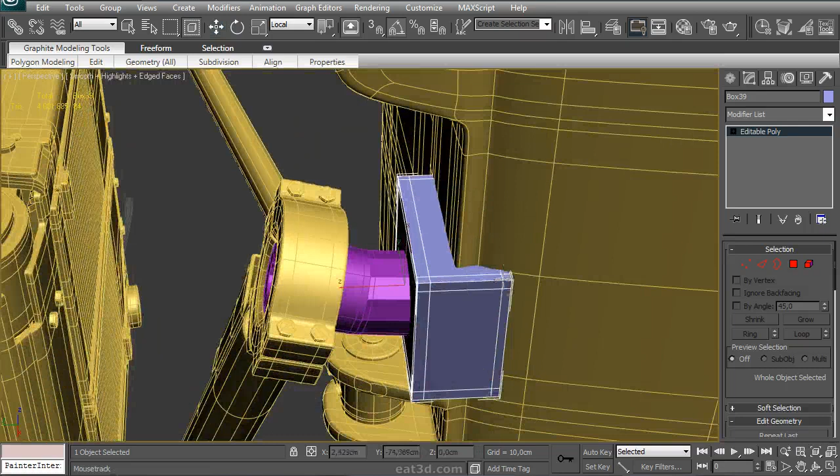Change the general shape a little bit, and then just copy the Turbo Smooth and paste it on.

Okay, so what we're going to do here is make it a little bit more interesting by creating this small extruded part. I'm going to bevel on that one - always looks better, something like this.

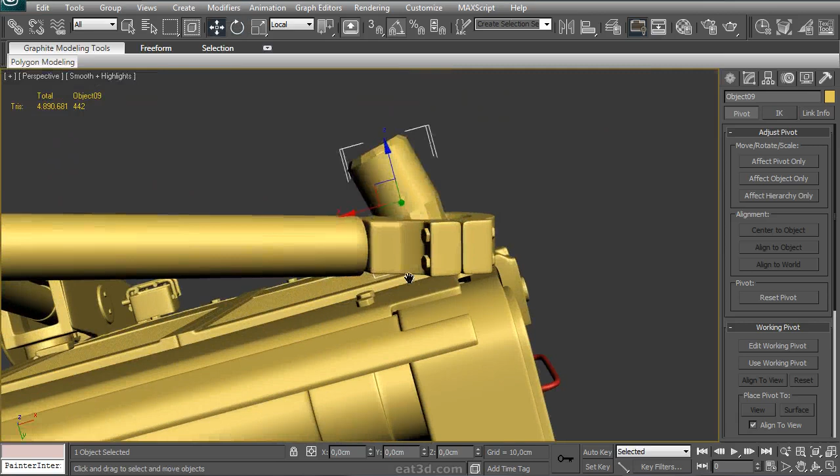Okay, so I like this part. I'm just going to copy it over to the other side. Since it has the same angle as the front, I can just take this part, rotate it slightly, and we can use it for the same type of connection. There we are, 180-degree rotation, and just move it into the right spot.

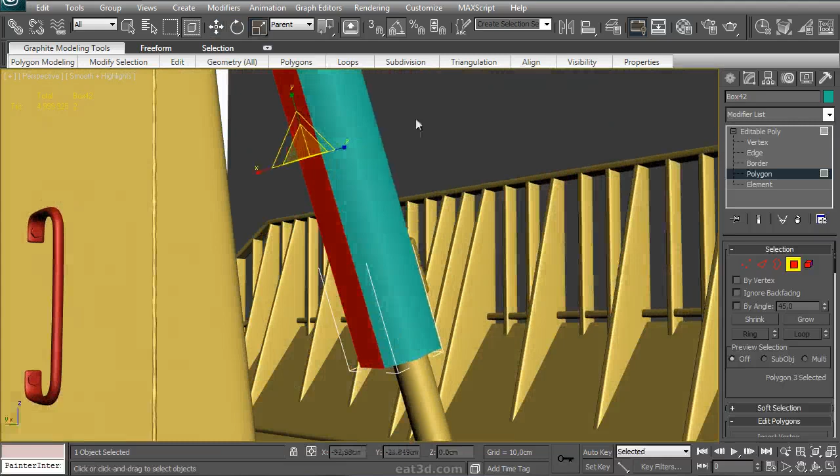Another small thing we're missing here is a little bit more armor on the pistons that move the front blade up and down. Just using a plane here, or a box, it's all the same. Just creating this sort of armored part around it. Looks okay.

This sits mostly at the back, since there are a few sides to it. This armored part, you're still supposed to be able to take it apart, so it's not completely solid. They still have to be able to perform maintenance on this bulldozer. So that's why they think about these things and make sure you can take them apart while not compromising on security.

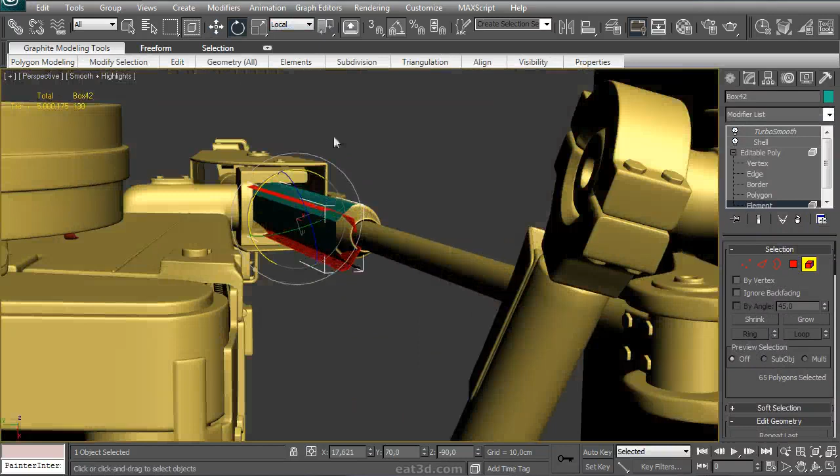So that's what this part looks like. Forming a shell just to get thickness in there. Just remember this one: if you want to create these armored plating parts around something, then just use shell, it's easy.

Move that one over there. Select those edges and then move them slightly down. And this one's a little bit thicker than the other one, so I'm adjusting that as well. And it sort of slopes down at the bottom. There we are, that looks almost okay with the shell added.

I've chamfered the front part there to make things a little bit harder because I had a little bit of slanting at the bottom. With the general shape of that part done, I'm just going to continue and add a little bit more of those small details.

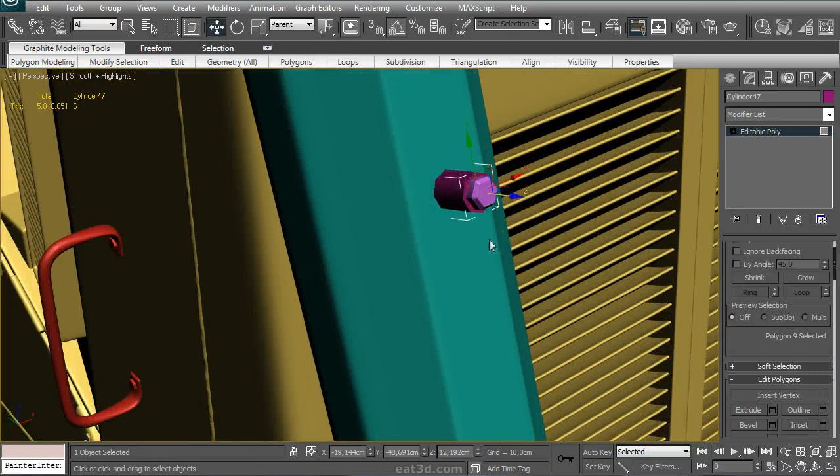As you can see, I've used the cylinder here together with a slightly modified model of the nut that I use all over the model. Just duplicating this around a little bit, something I've been doing all along. Slight extrude to make it a little bit more interesting, together with a bevel. You've seen this being done a few times before already.

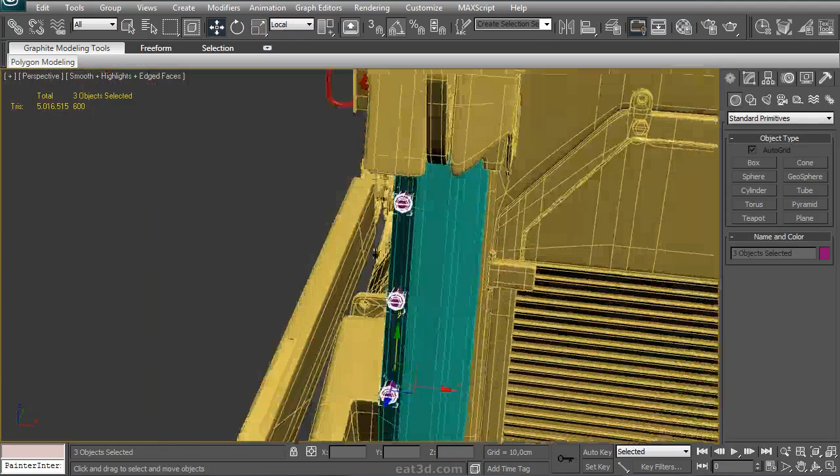So that looks okay. I'm going to copy it down there 3 times, it looks about right, and then take it 3 times to the other side. As you can see, this is what makes the 2 armor parts stay together. They're just a few cylinders with nuts on them, and that way the 2 parts are bolted onto each other.

Okay, with that done, as you can see here, I'm drawing some splines, and these splines will form the hydraulic hoses that I was talking about. Right now I'm just taking the Bezier handles and moving them around slightly.

So at the back here of that big piston, I made a few very simple parts. They're just cylinders with a few extrudes and insets on them. And these are the actual sort of, how would I call them, the valves or the connections for the hydraulic hoses. This is where the hydraulic hoses feed into the hydraulic systems.

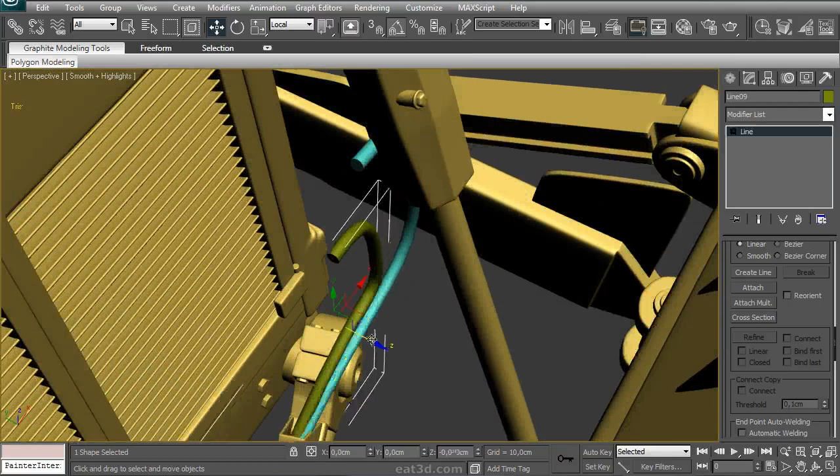So there's actually a pneumatic hose running along that tag link beam. I've drawn 2 here. They go in at one side and then come out at the other side. And interestingly, these hydraulic parts originate from somewhere around the front of the hood of the bulldozer. So that's where I'm actually creating them.

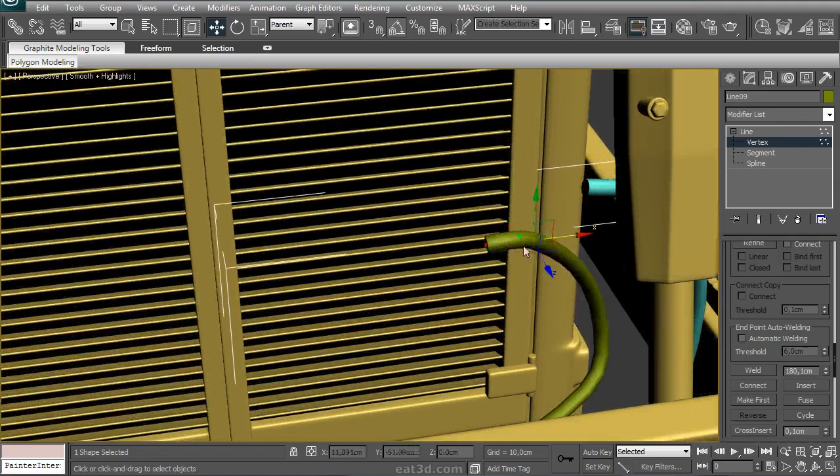Made a little bit longer using the create line, and then just moving this part around slightly. As you can see, it's a little bit hard when you draw parts in 3D to make sure that they all line up correctly.

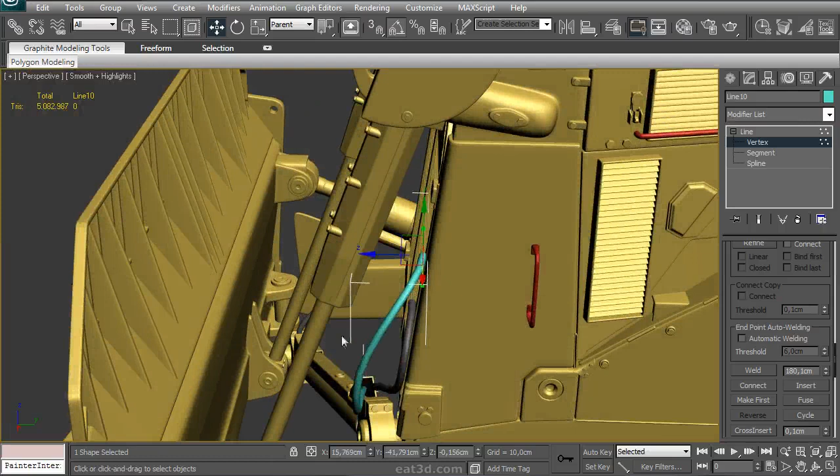Need to modify the Bezier handle a little bit here. So that green one looks okay, I'm going to change the color. And now I still have that blue one to do. It's just the same thing: I move them around a little bit and make sure that the flow of the hoses looks natural and not with some unrealistic bends and the like.

There's really quite a few of those hoses that come out of one side, I think about 4 or so. So here's the 3rd one. I'm just copying one and then slightly modifying it, as that's much easier than creating a new one from scratch. And the 4th one here, I start with moving it around a little bit, and then I take the separate Bezier handles and move them around until it looks similar enough.

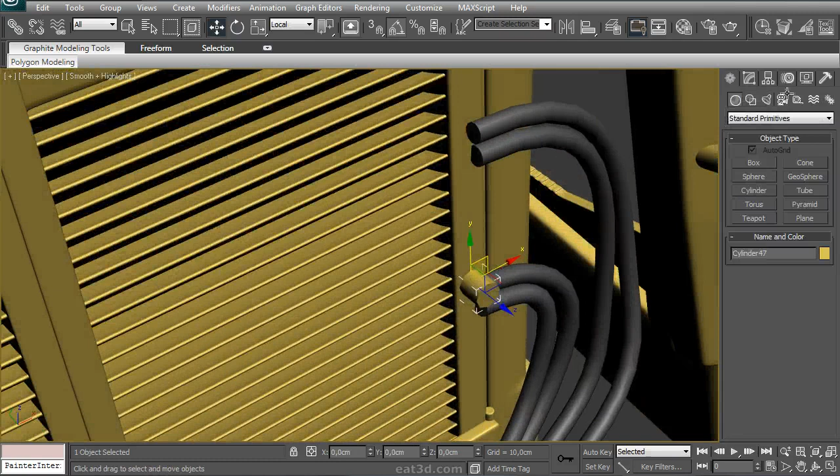So there we are. Here you can see me creating the attachment for these pneumatic hoses. It's just a cylinder, very simple. Then I perform a bevel, an extrude, an inset, and then just add a few edges to make sure that the model smooths correctly.

Okay, so moving these slightly so that they will connect nicely with the attachments for the pneumatic hoses. Move this one down, move that up, and there we are. Now they should be all attached. Okay, so we've got it done.